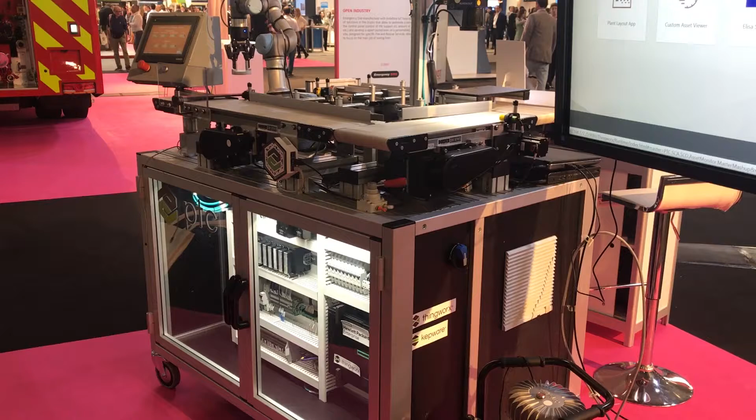Here we can see the demonstrator, which has around 80 sensors delivering 800 data points per second. So much data for this small part of an assembly line. We start from the assembly process, over quality management, and get all the data from it.

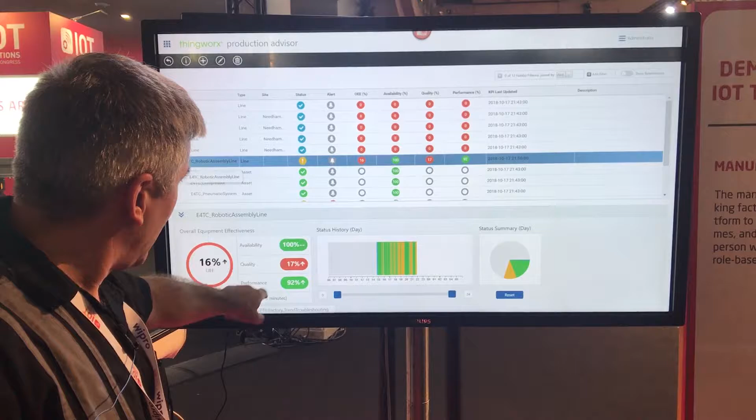As I said, we have different applications, and as a production manager, I may be interested in how our manufacturing line is doing. So I'm just looking at it, choose the line, and we have all the key figures that are necessary for a production manager to rate how the line is doing, how much product will be produced, and how much good product is produced.

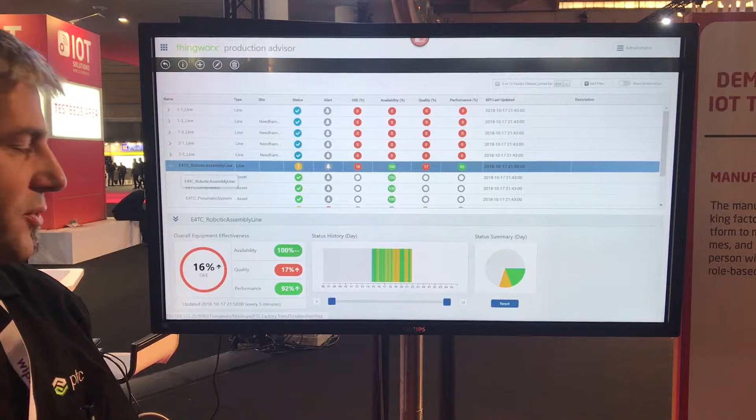And on top of it, as I said, we have the augmented reality solution. So if we come over here and we scan this code...

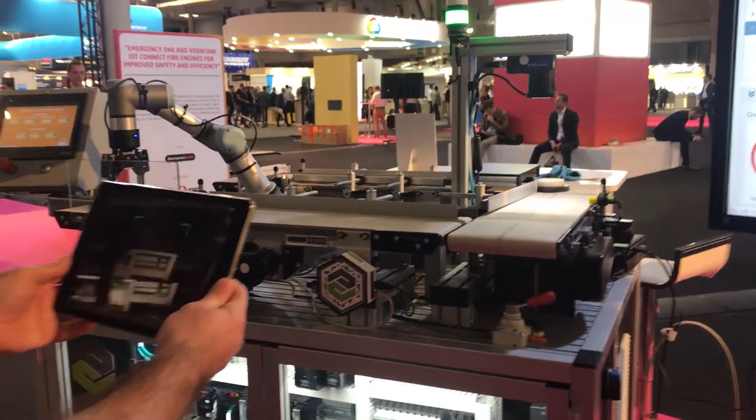Now what we have seen so far is everything on premise, but we have a hybrid system here. So now we're going into the cloud and getting data out of the cloud. We can see all the key figures are augmented on the system, so I don't need a device to have it.

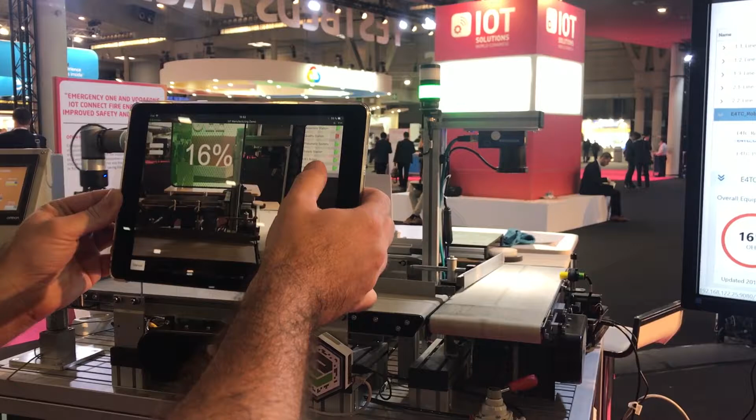I can also use a HoloLens or a head-mounted device. If I want to see some information about special things, I can look at the compressor and see the values, the humidity and the temperature of the compressor.

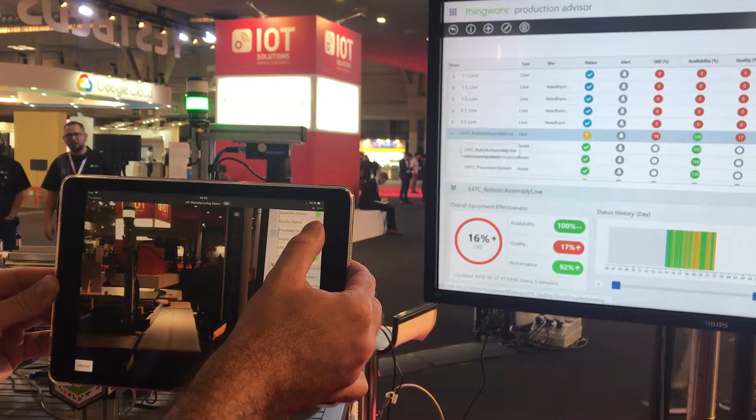And you see on the quality station we have a problem, so we have an exclamation mark. That means there is an alert running on that system. So I click on it, and now we get some 3D CAD data from a PLM system and some warnings.

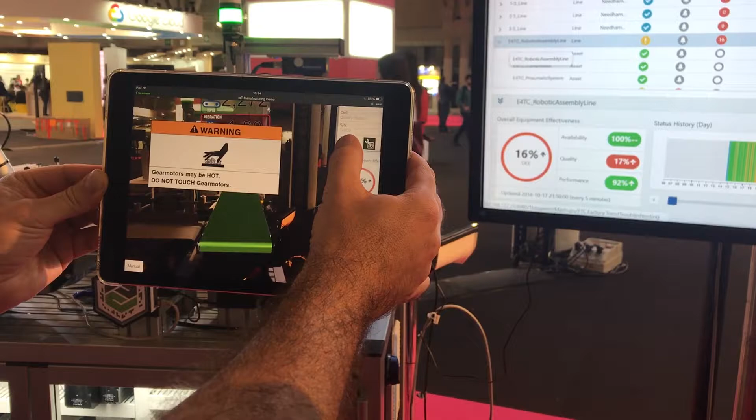And in the background you see the vibration is too high because we have a failed bearing. So now I can say, okay, can you show me how to replace the bearing?

Now a second warning comes up because it says unless it's switched off, I'm not allowed to work on it. So I just push the play button, and now you can see how this will be replaced.

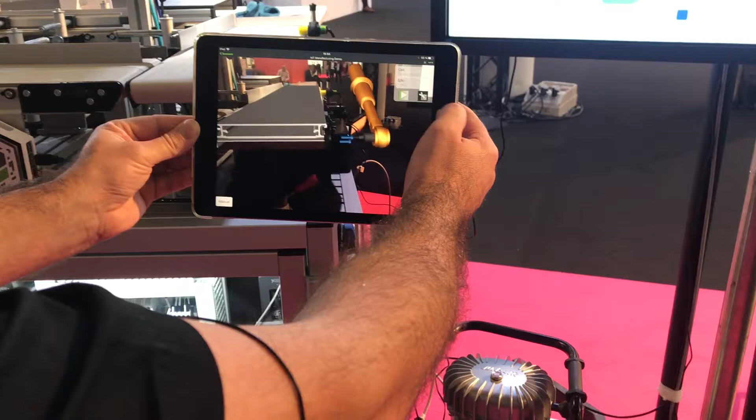Which tool should I use? Then take out the bearing, bring it back, fix the bearing again, and then put the belt back on.

All this information helps our customer really gain the advantage of Industry 4.0 purposes.

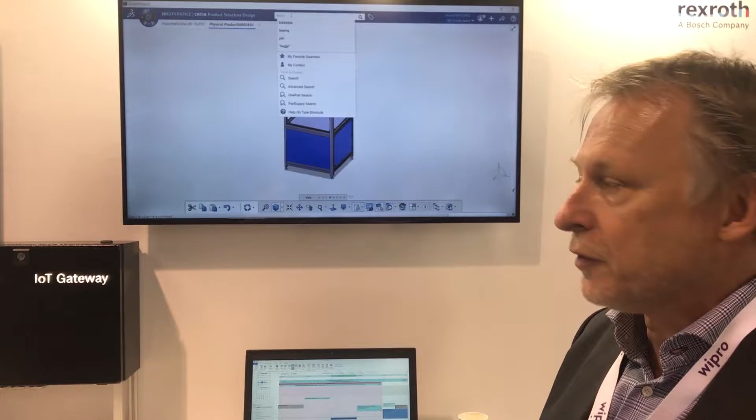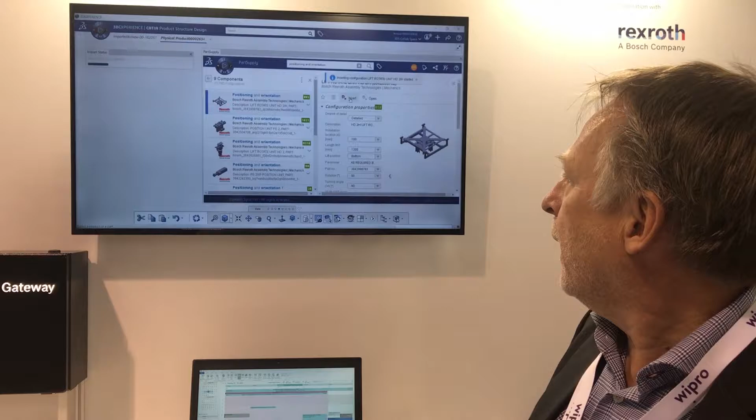Let me start here, just showing you the layout. We're starting with the layout of the machine. What we do is go to the marketplace, the part supply marketplace, where you look for elements, for example here from Bosch Rexroth, that you can configure online with different parameters. You look for the right equipment to build the mechanical layout, and rather than only importing a CAD model, you insert it directly into the CAD system with all the behavior modeling behind it. It's not only a PDF file and a step file, you really insert it directly into CATIA V6 with all kinematics predefined, with Modelica libraries that define it for further usage.

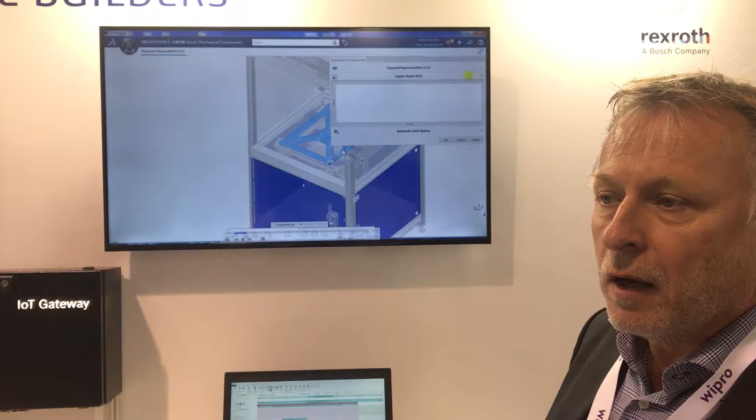Let's go a little bit ahead. So you create the different elements of the line. And you position your line with the different elements into the factory, right on the layout plan. So you see, we have the one that we just defined.

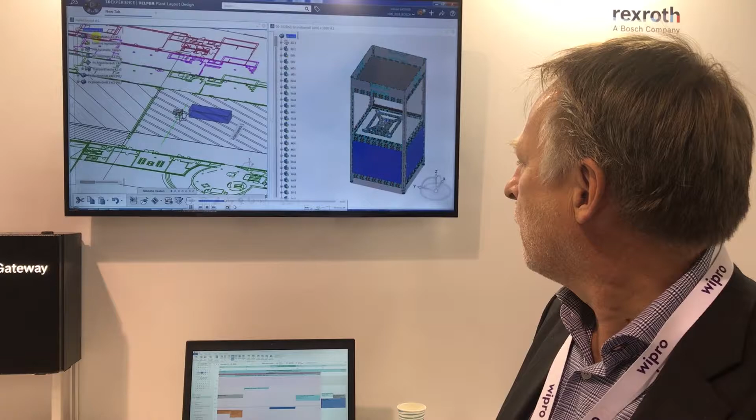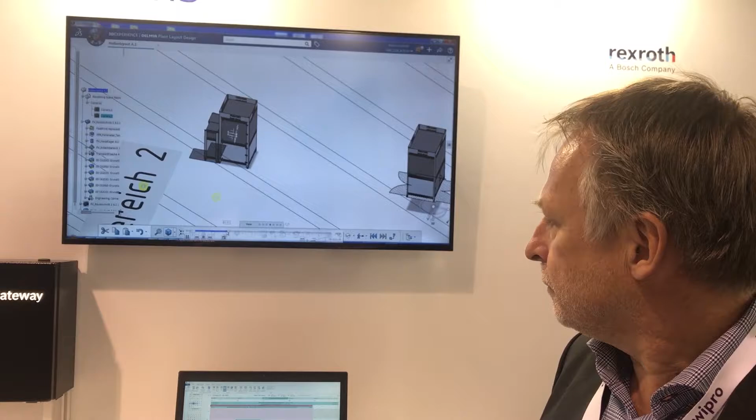Now we build the complete line here on this layout. We attach the different modules that we have for the line. You have the robot module, a module where you do the housing, you do screwing, you have a robot module, we have a laser module, etc. So we fit it together, creating a line layout in several steps, and then do what I just said before: we do the details on the axis programming, the behavior, and how the machine and the different modules work together. That's really getting there.

So you define, it's not only kinematics again, but you prepare for programming of the complete line, the behavior of the line, and you test how these different components work together.

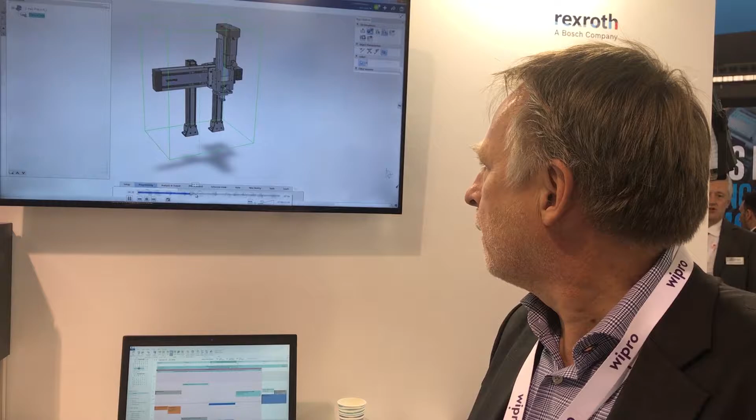What we're doing here as well, we have the different components, the layers, the modules that we put together. Now we are really going into the programming of the complete line with product control build, where you test the logic of the machine, how you get it really together to make sure that it works in the end.

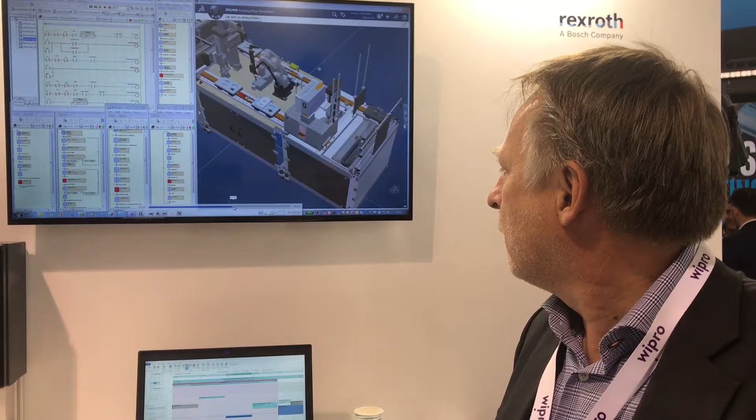Every single position - what's important here is that based on the 3D Experience platform, we have all the data that we created on the platform. It's not only the CAD data that we started with, but the complete process. You have in the system, on the platform, within one data model, the 3D, the requirements, the functional description, the logical description, and the physics behind it.

Coming from here, you use it for creating the line, so we prepare everything in the virtual environment to make sure it works when you really start getting the line together. What we're working on in the next steps, which we couldn't show here, is the auto programmation of the PLCs of the line, so that the code is automatically generated from these virtual definitions.

We do even more - we have the sensor data. In this example, we work very closely with Bosch Rexroth, who has a device called the IoT Gateway. The IoT Gateway is there to collect the information, all the sensor data in real time, to filter the data, to secure the communication with a data lake, which could be Azure or any other cloud-based system, and to make sure that all this information is really available.

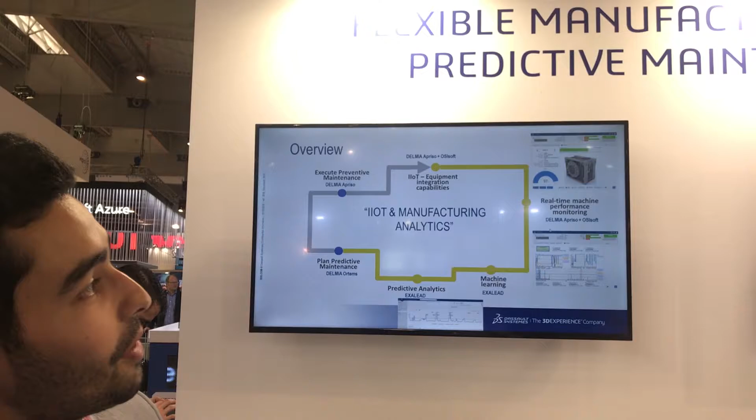Hello, welcome to our flexible manufacturing with predictive maintenance experience. What we're showing you today is a full experience that we've done in Dassault Systemes through the experience platform. We're starting by grabbing the data from our machines, from our IoT sensors, using our Delmia Apriso software.

We also use and work with our OSIsoft partner to grab the data. So the challenges here are how to capture the data, how to store the data, and how to analyze the data. Once done, of course, we can monitor the operations and the machines within Apriso Delmia.

And within the same platform, we will have the capability to learn more and to predict new failures. And now in the story, I'm showing this Exalead machine learning and predictive analytics.

What we are doing, we are using the big data, using all the data coming from the platform and from our other software to predict future failures. Because we are using one single 3D experience platform, once we predict a new failure, we will give a task to our colleagues within the platform, within Delmia Ortems, to schedule and execute an action.

So please come with me, I will show you here one application which is called the manufacturing analytics application. The purpose of this application is to help the user, let's say I'm the factory manager, I will need a smart tool to predict the failures and help me take action.

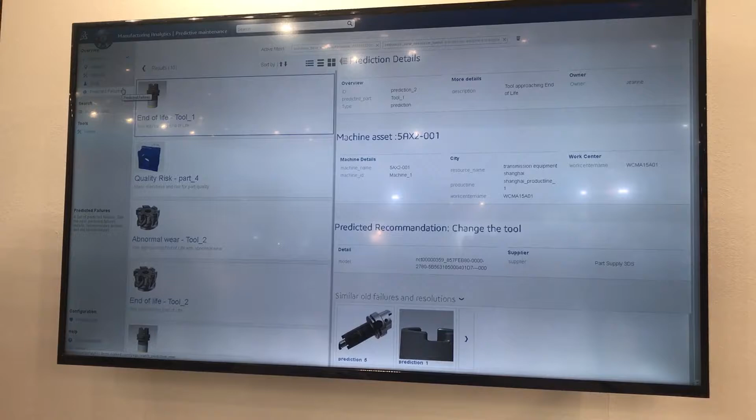So here you can find on the left the list of all the predicted future failures. Let me first explain how we can have this kind of view. Of course, we need to have a lot of data. For this experience, we were working on 79 machines in six factories in the world. So at the beginning we have small analytics and KPI capabilities which enable us to drill down and analyze our factories better.

So here I'm filtering on one factory called Transmission Equipment Shanghai. I want to have a better view on all my analytics and KPIs within this factory. Here I can see the major KPIs: overall equipment efficiency, performance, quality. I will continue to analyze, drilling down on the work center which has the lowest efficiency ever, and I can see within this KPI that this one is the lowest.

So what we can see now is we selected the work center which has those 3 machines with a decreasing efficiency. Because we are historizing the data, of course we can compare the efficiency before and now. Once we have that, I will move to my detailed view about each machine to understand better how it's working.

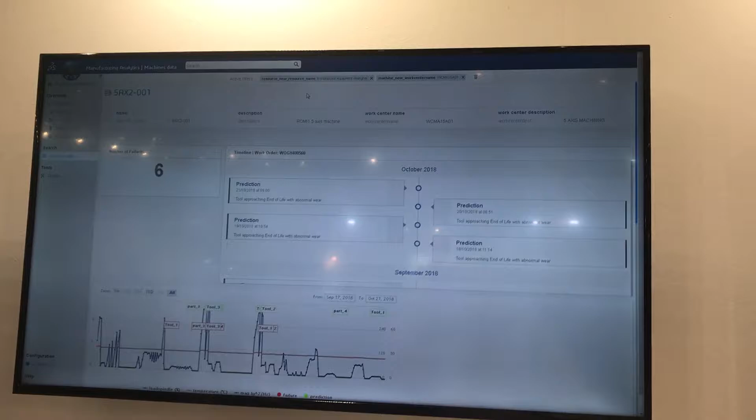So here I'm zooming on one machine called the 5-axis machine, and here the magic will start happening because we're grabbing the data from everywhere — from our Apriso tool, which is the tool which enables us to monitor the operations and the maintenance.

So we have here some events, the setup, running, downtime, etc. Better than that, we have some graphs which will show us the real-time data coming from the sensors, from the machines. In red, we will have the old failures that we have in the past months, years, decades.

And in green, because we have a big data factory and we can use our machine learning algorithms to learn from those failures, we are using deep learning to give a fingerprint to each failure and to predict future failures. So what you are seeing here is an example. We are predicting a new failure that will happen now.

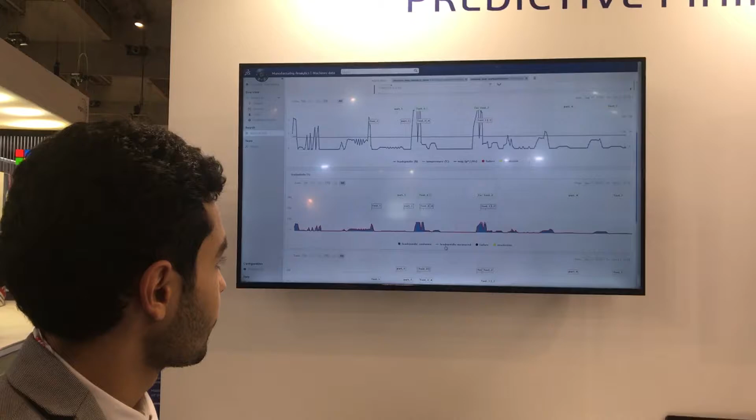Because we are using one 3D experience platform, we can use the virtual world and combine it with the real world. So here what you are seeing in blue is the data coming from the simulation world, and in red you will see the real world coming from the sensor. So it will enable us to have more detailed views to compare the virtual and the real world.

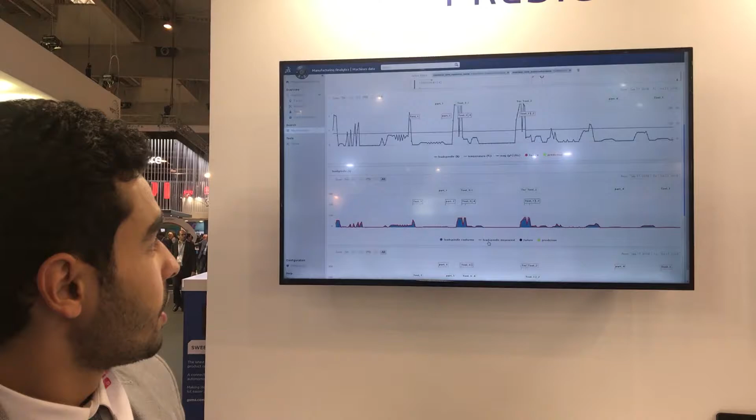So as a facility manager, I want to understand better this prediction. I will click on it to have more details about those predictions. So of course I'm predicting a new failure, but better than that, I will recommend some action for my users, because we are giving some fingerprints to each failure. So we will help the user find similar old failures, and we will recommend one action to our operators.

So let me give you maybe two takeaways. First, we are using one single platform, which is the 3D experience platform. We have a digital continuity within all our workers, the designers, engineers, manufacturers, operators. So we are learning and we are also closing the loop.

So we are learning from the real world and putting all the information into the virtual world. And because we're starting to combine the virtual and the real world, we are ameliorating our products each day.

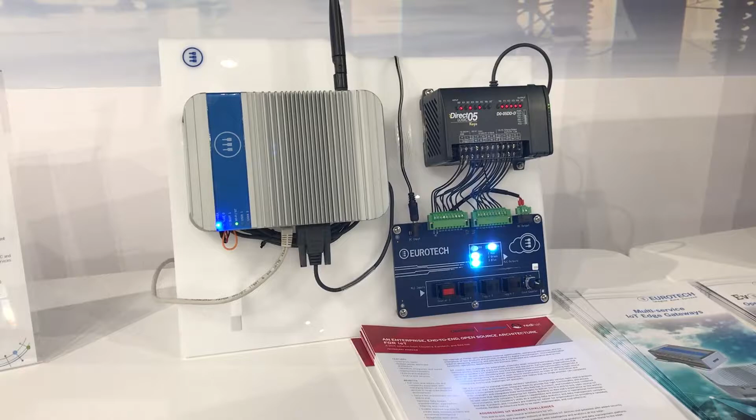What makes us different is that as Eurotech, we have a wide range of gateways for very different verticals, whether it's industrial or transportation. So the same gateway applies on a bus, for example, or a train, or a light tram. Each of these different verticals have different certifications, so our family of gateways are ready to be deployed in those verticals. They come pre-certified and with all the connectivity options.

Not only can you deploy them and reliably operate them, you have software that runs on this gateway that simplifies the acquisition of the data points, the acquisition of the data sources, the edge processing, so you're able to aggregate, filter, and do some analytics on the edge, as well as publishing into the cloud. We can do one quick demonstration, maybe if you come with me.

We have a demo showcase here, so it's a simplified version of an industry factory floor plant. The breakout board simulates what it is a machine. The machine is connected to a PLC. The PLC extracts the data through Modbus, which is a typical industrial use case protocol to interface with the machines.

And then this is one of our gateways. The gateway has software. Our software that runs on the gateway is called ESF. It's a stack layer. It simplifies the data acquisition from the edge, the processing, and the publishing to the cloud. So with this software, you can model your data sources, create a digital twin of your object, and then publish it into the cloud. We can see it here.

So I'm actually now connected into the gateway, and in the gateway I've built visually, without writing a single line of code, a data pipeline that on a periodic basis connects to the PLC, extracts the data and the status point, which I have modeled through a visual programming tool.